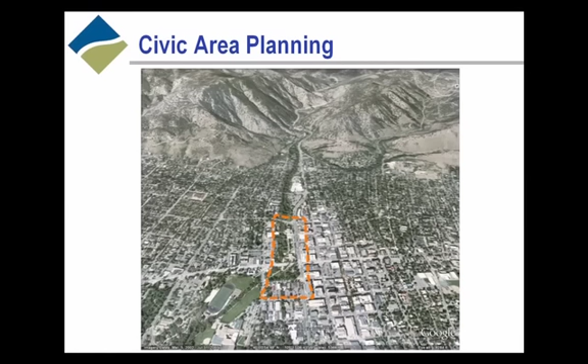So I'll start briefly to give you a broad background of the civic area planning to date. The civic area within the City of Boulder is located within the heart of the city, right just directly west of the downtown area. What you see marked in dashed red outline is the focus area for this ideas competition, but it's also the focus area for the planning process.

Within that, you see a salmon-colored boundary between 14th and 9th Street. That is what we are calling the more focused area, primarily because that's where the civic area and functions are located, and where about over 95% of the property within that area is publicly owned, it's city-owned. For the competition, while the larger area is just as important, the primary focus area would be the area just outlined between 14th and 9th Street.

The actual civic area planning, which started about 6 to 8 months ago, is primarily to develop a comprehensive vision for that general area and to help guide decisions about the future of city facilities. A significant amount of city services are located within this area, so we want to determine what the future facilities and functions of those facilities ought to be.

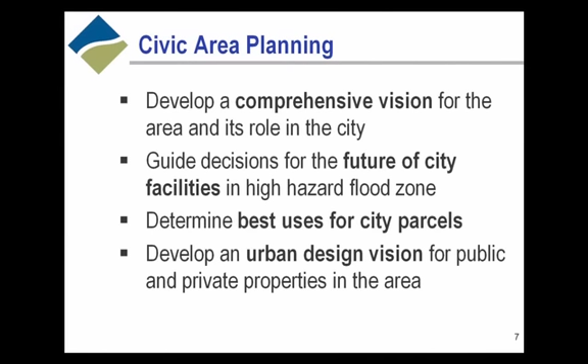We also have quite a number of parcels there that are possible for either open space, park, or other developments or program ideas that could be developed for the future. And we also want to establish a cohesive urban design for that whole public area, specifically in the public realm, whether it's the parks or the streets within that area.

As I mentioned, this process actually started April of this year. We're about halfway in the planning process, which will take us to next August 2013 for an area plan to be adopted. The ideas competition is one of the pieces in this whole process that's going to help inform what types of uses and ideas should be considered as part of an adopted plan. So we're right at the start of the ideas competition, right in the middle.

This builds on a very exciting and robust public process over the last several months, where we've been gathering a lot of ideas and wish lists from the public in terms of what should be included within the civic area. We've done this both through traditional public workshops, but we are also getting a significant amount of input through online ideas collaboration engagement.

So the inputs from that public process were synthesized into 7 key guiding principles for the planning of the civic area. Those guiding principles, as you've seen in the design brief, which we'll talk about later, are kind of the guiding principles for the competition as well. They frame the issues and ideas that should be explored through the ideas competition.

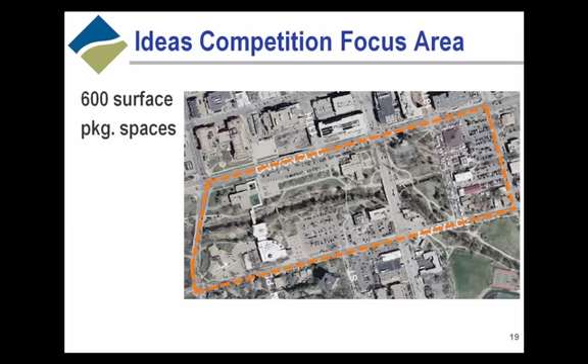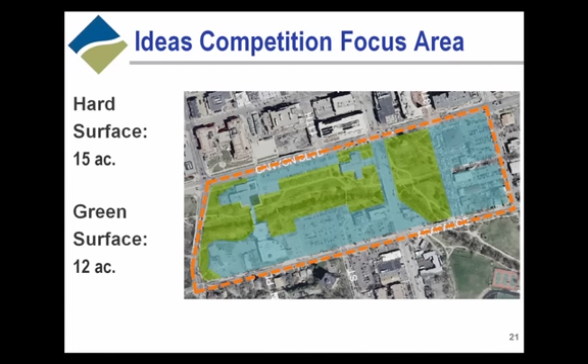If you look at that whole area, more than half of it is either built structures or surface parking, and about 12 acres of that—the total site is approximately 27 acres. Out of that, 12 acres is either the creek, park, or some form of green space.

As you consider this—and all of this is in your design brief and on the competition website—there are several areas we're beginning to look at for new program ideas. Within the blue area, within the 100-year flood zone, habitable structures are allowed within certain restrictions related to flood.

2.7 FAR, meaning 2.7 times the site area, and within a limit of 55-foot height. So generally a maximum of 4, sometimes up to 5 floors, if you can fit it within a 55-foot height limit—that much structure could be built.

Within that 2.7 floor area ratio, usually you don't get that much—it's usually average 2.4. So that's something to consider if you're thinking about square footage to fit that area. But it's also important to consider that...

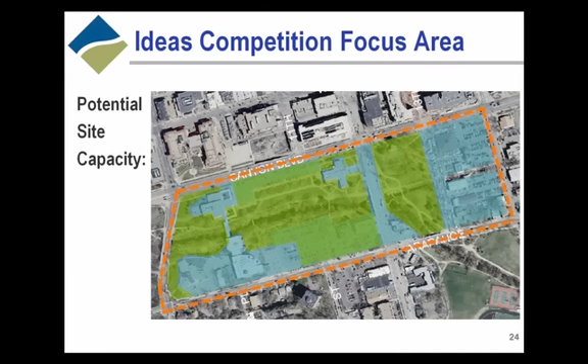Various proposals for relocating or reconfiguring both structures and surface parking that are located within the high hazard area.

Now I'll talk briefly on the highlights of what the charge is for the competition, and these are all in the competition brief on the website. We're looking for two general areas in terms of proposals. Actually, there are two parts to the competition, and you're open to propose for one or both.

The first is a vision project. This is about long-term ideas for the next 20, 30, 40 years—what are the compelling ideas based on the guiding principles and some of the ideas we heard from the public, that would make sense in terms of a mix of uses—public, private, art, or other related uses identified within the project site, as well as the performance sought through the guiding principles. So, proposals for a vision project.

We also want to look at some short-term proposals for the next 2 to 3 years that could be built as a catalyst or catalytic project, a near-term project. You're open to propose those too, and they may focus mostly on the outdoor space. There are some suggestions highlighted in the design brief that you could read.

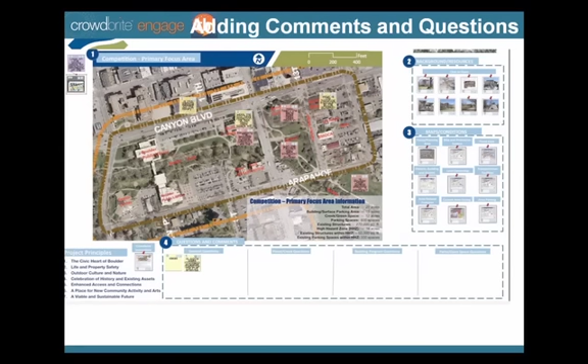We have buckets on the canvas to allow you to post questions related to general, flood, building program, or parks and open space. You will see the other questions that have been posted, and you can review the answers. In the upper left-hand corner of the canvas is where the recordings of the webinars will be, so you can review those as well as you go through the process.

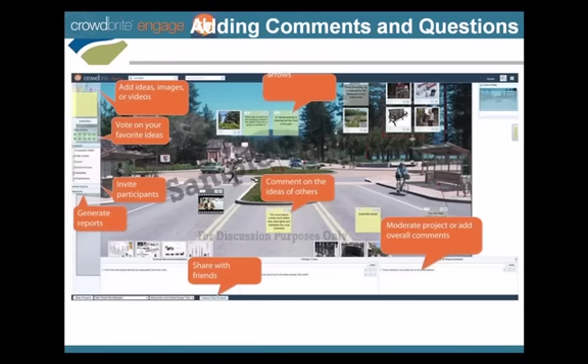The platform is very easy to use and user-friendly. After logging in at crowdbrite.com, you basically just go in, and in the left-hand corner there is a little yellow sticky note. You can change the color according to the legend. You can add images, video links, upload ideas, and post comments on other people's ideas. It's a very interactive platform in Canvas.

You can also directly from the canvas invite other people to participate and comment on ideas as well. This is the instructions for the process. All this text is on the welcome message as well as on the canvases, so you can refer back to it if you have any questions.

To get into the platform, you go to crowdbrite.com. It's free to create an account and log in. Boulder is a featured project, so it will show up right at the top of the home page there on crowdbrite.com. You can download the user guide for more information and questions. We also have an iPad app, free to download, in case you want to use it on your iPad or your mobile phone.

It'll automatically send you emails. If you post an idea or someone comments on your idea, you'll get an email about that to let you know that people are looking and commenting on your ideas. So that's just a little bit about Crowdbrite and the platform that we're using.

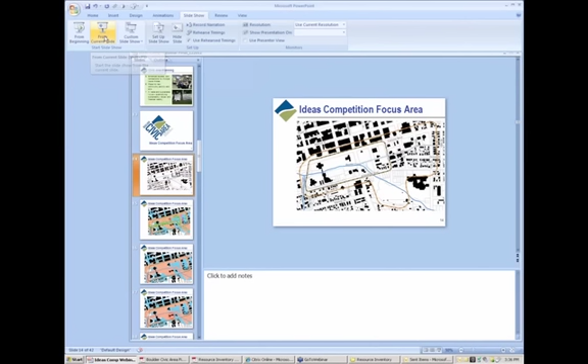Another question related to buildings is: should a major new building not be included in any entry? I'm sorry, say that again? So then, should a major new building not be included in any entry?

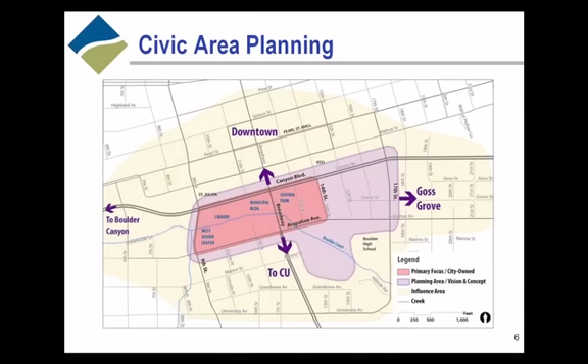No, you're very open to propose any major new building within the buildable areas that I explained earlier, which is within the 100-year flood zone. Those are open for consideration for major construction or renovation. So within - let me see if I can get to that map.

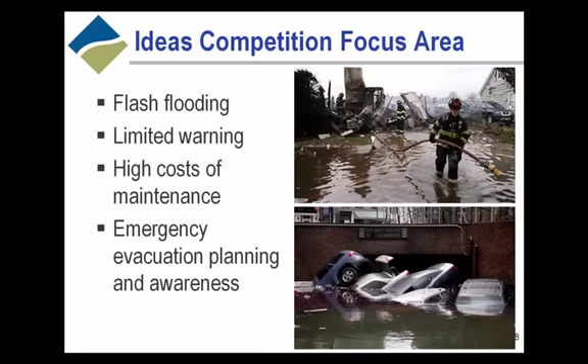So this map, which is included in the design brief, outlines areas for consideration. In any of those areas, you can propose any number of major buildings or a mix of major buildings.

Okay, we have a number of questions, this is in the general category. A number of people are saying, due to the time frame being so short for submitting information, and the fact that it's over the holidays, a number of questions have been asked. Again, when will everything be posted? Please post the site plan digitally so folks don't have to redraw it. And related to that, people want to find out how to get a copy of the PowerPoint presentation and slides.

We can post the PowerPoints tomorrow. We'll try to post the shape files by tomorrow as well. So I would encourage you to look at the website, because on a daily basis we have new information that we post.

Okay, I just want to add. I'm sorry, go ahead. No, go ahead.

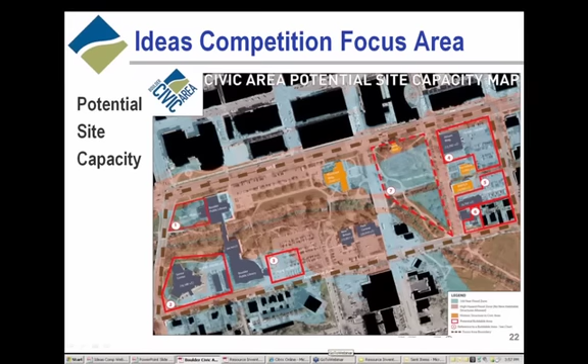Where is the template for the PowerPoint, Sam, so that helps people find that information and clarify that? It is on the website. It's located as... I have to pull it out to show you, or if Darren is there, he could explain exactly where those are included as well. So if you go to the design brief, where the slide descriptions are, you can click and it takes you to a downloadable PowerPoint template.

So from bouldercivicarea.com? Yeah, for each of the projects in the design brief, starting on page 2, the requirements for the slides are there, and at the end... here, I'll pull up the page. Won't let me. So what is on your screen is the idea design brief. This is downloadable, and if you scroll down to each of the vision projects, I could go through that—your submittal requirements. Sorry.

This is Darren. Just a reminder that it's a fairly simple application. The PowerPoint slideshow is very specific, and you just walk through and answer the questions in the PowerPoint, and they directly track with the evaluation criteria. Secondly, there are notes for each slide that provide additional information and instructions. You can also include additional text to describe your project or ideas that relate to the slide, up to 200 words per slide. So it's fairly straightforward. You just need to complete each of the slides to support your boards, and you can provide additional text information as well.

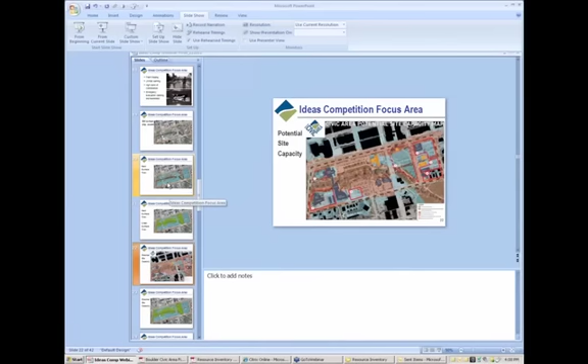The next question is, can parking garages be in the high hazard zone if the ground floor is open? No parking on the ground. So there's a restriction for any structure that is habitable or any new parking in the high hazard zone, whether it's structured or surface.

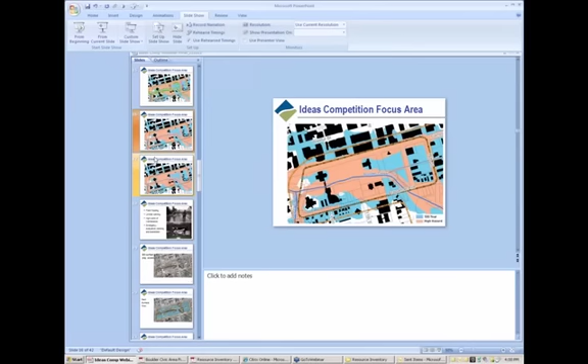Let's take a look at the questions really quick. We have a couple people who have asked a number of questions, and I believe we have answered most of them. But let me just take a quick look back. There's been, I want to say, about 50 or so different questions answered, some of them duplicative.

So hopefully we answered all the questions again about the shape files and sketches, maps, and background information. That's not already uploaded to the website will be uploaded tomorrow. The timeframe for the competition, unfortunately, will not change, but all the information is available after logging into crowdbrite.com. You can also find it on the Boulder canvases—one canvas is for the Vision Project, one canvas is for the Catalytic Project.

Here's a question I'm not sure we answered: what is the limit of members allowed for each team? Does each team member pay a registration fee, or does one team equal one fee? One team equals one fee, and there's no limit to the number of members per team for each submittal. We actually encourage multidisciplinary teams, and one fee covers both categories.

This is Darren. With that in mind, one person asked if we could distribute the list of names that have signed up for the webinar so they could team up. I don't know if I have an answer for that one, Sam—if they can team up? Someone had asked for the attendee list, and I shared it with that person so she could see who was on it. But we did not ask if people logging into the various webinars today and next week are interested in having their information shared with anyone else. So you can see the names, but we won't be able to share people's individual contact information.

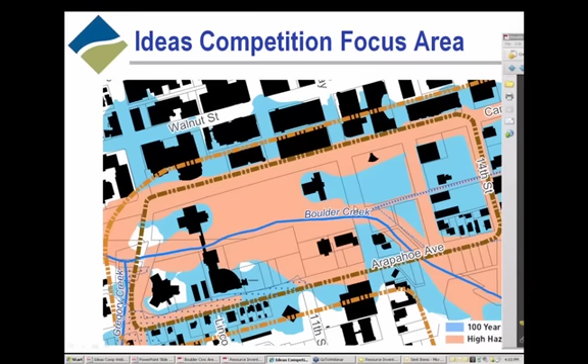Okay. What type of catalytic projects are you looking for—more landscape and less building focused? If you read the guiding competition brief, it gives about 5 or 6 specific general ideas, but you're open to propose. It limits the cost to about $300,000, so that most likely means ideas for signage, or making the park or area more cohesive with certain art elements. There's a farmer's market located on 13th Street, and there are ideas—because that's a critical part of this program—about how that farmer's market could be improved in terms of function and layout, whether it can extend in one direction or another. So it's really about the public realm or outdoor space, because of the size and scope limitation. There are about 5 or 6 ideas listed in the design brief that specify examples of what those are.

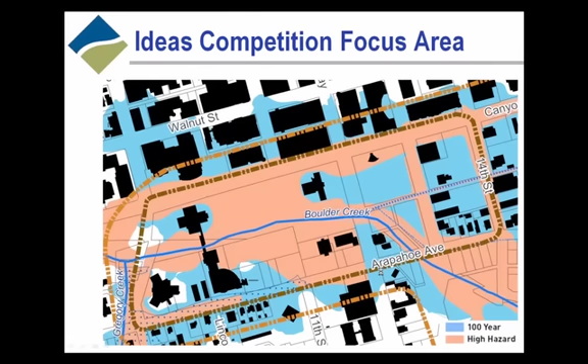Someone would like to point out that there is a building east of the transit center that is not shown, and that may affect what is proposed. There is no transit center in the study area, so I'm not sure which one. It says: I just want to point out that there is a building east of the transit center that is not shown, and this may affect what is proposed.